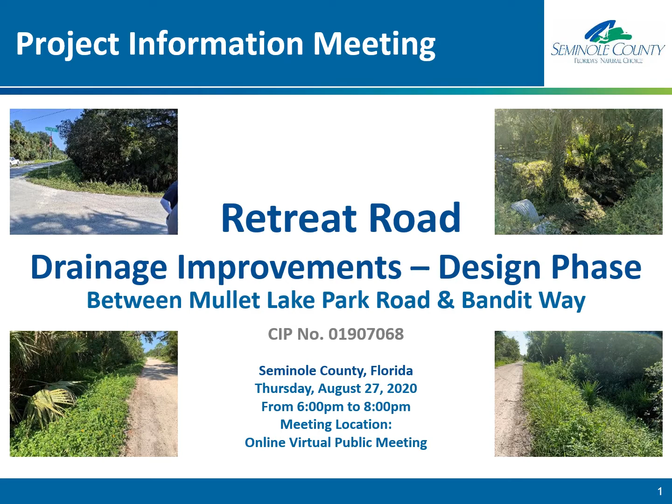Tonight's meeting is being conducted consistent with Title VI requirements. Public participation is solicited without regard to race, color, national origin, age, sex, religion, disability, or family status.

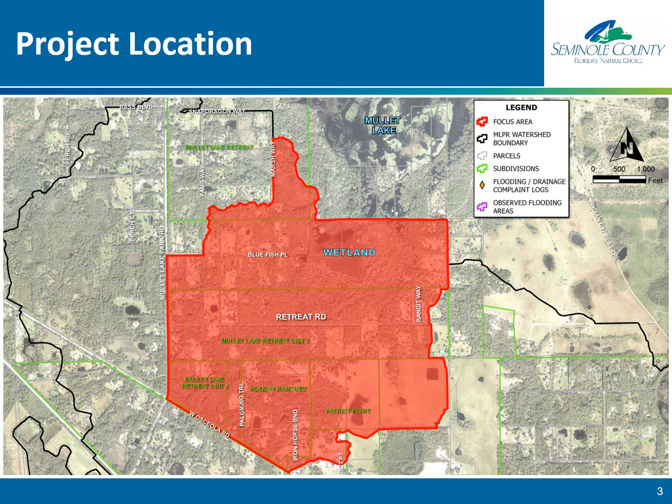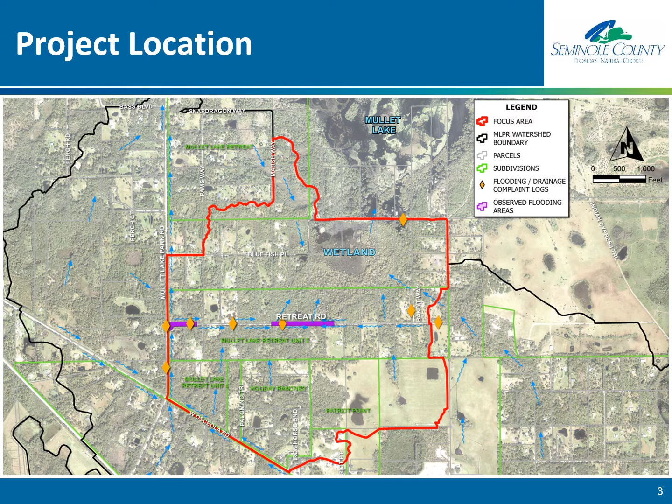Focusing in on Retreat Road, it is obvious there is reoccurring flooding following significant rainfall events. This flooding makes it difficult, if not impossible, for residents and emergency responders to use Retreat Road during significant rainfall. This is a major safety concern that the county takes very seriously.

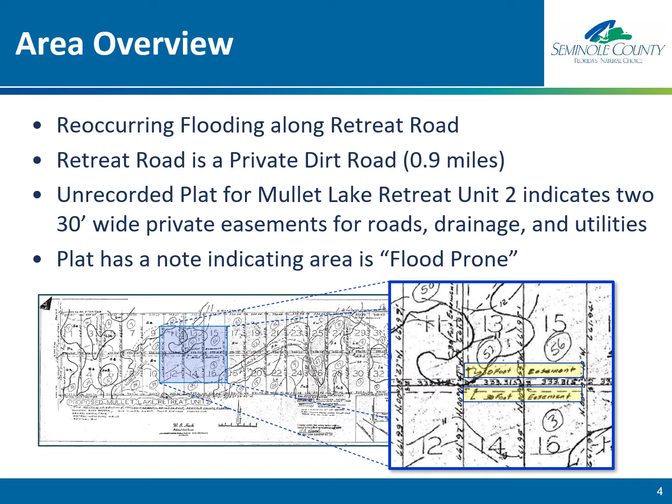One of the unique elements of having Seminole County involved is that Retreat Road is a private road. Maintenance of the road is the responsibility of the property owners within Mullet Lake Retreat Unit 2. An unrecorded plat from the year 1965 shows two 30-foot wide private easements that border the properties along Retreat Road. Retreat Road is generally centered within these two easements.

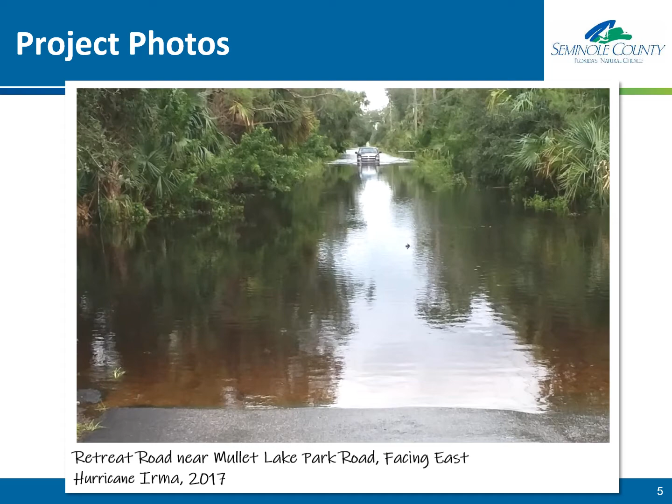Further east on Retreat Road, looking west towards Mullet Lake Park Road, you can see more flooding. This event was following Hurricane Irene in 2011, another significant rainfall event. As you can see, it appears the drainage ditch along the south side of the road is overtopping and flowing north over Retreat Road. This is consistent with the modeling performed during the planning phase of the project.

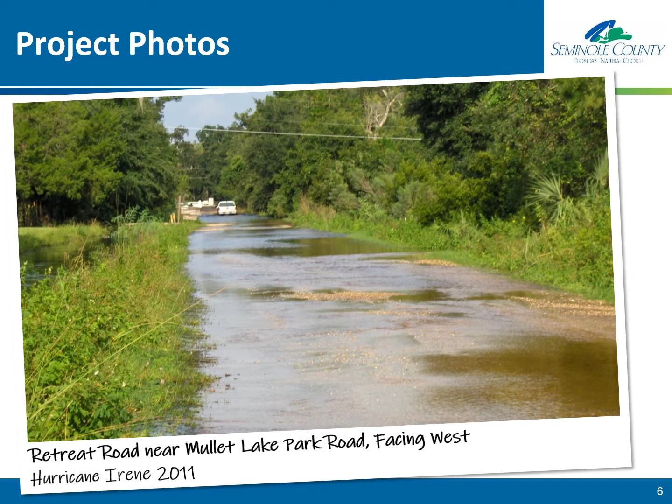These images were taken approximately a quarter-mile west of Mullet Lake Park Road following Hurricane Irma in 2017. This video, taken approximately a quarter-mile west of Mullet Lake Park Road, also shows flooding following Hurricane Irma in 2017.

Following the request of numerous citizens, property owners, and other stakeholders, Seminole County initiated an engineering study. The goals of the study were to confirm the flooding in the area by developing a computer model that simulates the rainfall and drainage flow, develop various conceptual improvements based on the model results to effectively reduce flooding while avoiding other adverse impacts, and to collect public input on the possible improvements. The study portion of the project and the first public meeting were completed in early 2020.

The county has obtained grant funding from FEMA through the Hazard Mitigation Grant Program to help fund 75% of the design and construction phases. The remaining 25% is funded by Seminole County. This funding source has very stringent deadlines that will be discussed later in the presentation.

The study design criteria was developed to provide flood protection for Retreat Road for the 10-year, 24-hour design storm event. This is the level at which Retreat Road begins to experience flooding. While this event is consistent with the county's criteria for similar roads, it should be noted that the photos shown were significantly larger storm events than a 10-year 24-hour storm.

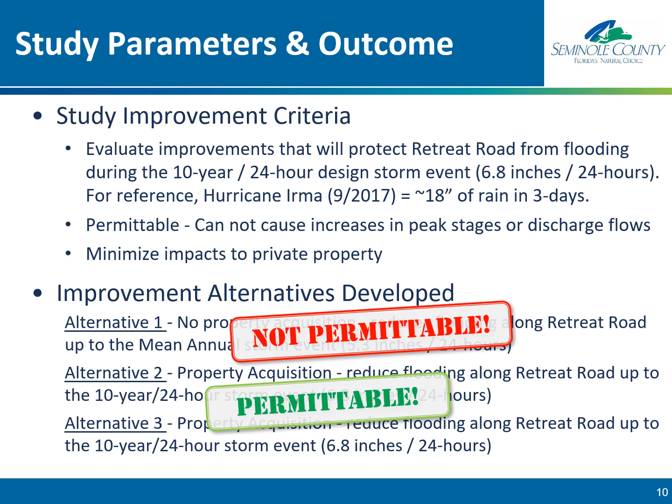Both alternatives provided the desired improvements to protect Retreat Road from flooding through the 10-year, 24-hour design storm event criteria. Both alternatives were found to be permittable through the St. Johns River Water Management District. As a result, the county quickly contacted the identified parcel owners and ultimately acquired the parcel necessary for Alternative 3.

Alternative 3 includes creating additional storage for stormwater runoff on the parcel acquired by Seminole County. Acquisition of the Goble property was completed in May 2020 for a total purchase amount of $273,000, including attorney fees.

The existing drainage ditches and culverts along the south side and those crossing Retreat Road would be upsized to more efficiently convey stormwater to the wetland area and outfall to the north towards Mullet Lake and ultimately the St. Johns River. Additionally, Retreat Road would be raised approximately 6 inches on average by adding additional fill in the 2 most flood-prone areas. These areas are depicted as yellow highlights.

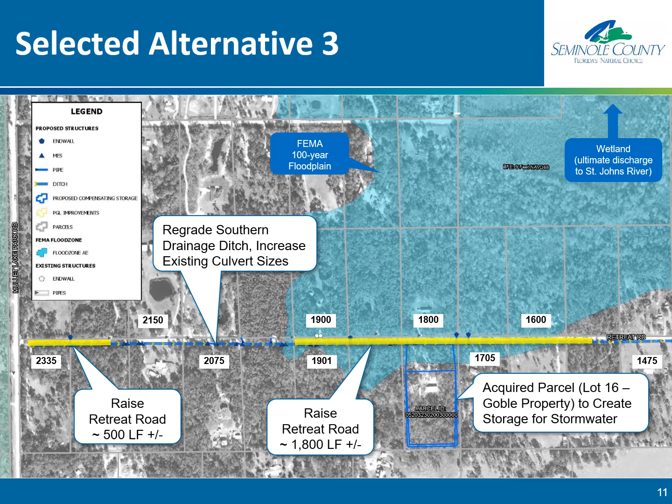These improvements would protect Retreat Road from flooding for a 10-year, 24-hour event. Estimated costs are approximately $1.4 million, including land acquisition. To reiterate, these improvements are anticipated to be partially federally funded through FEMA's Hazard Mitigation Grant Program.

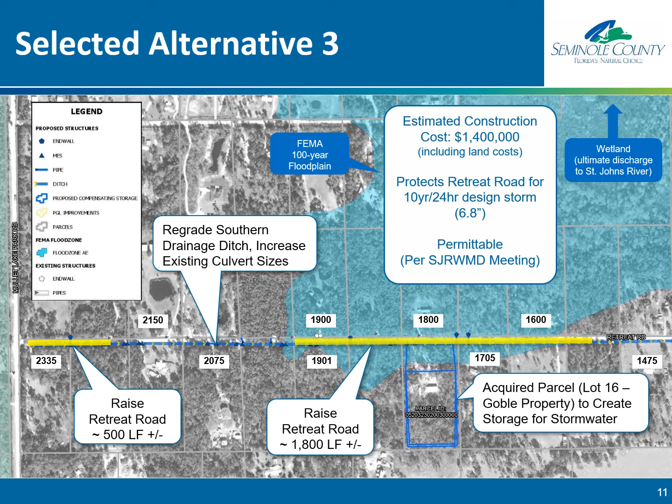Since the study phase was completed in January 2020 and the fast-tracked acquisition of the Goble property was completed in May 2020, the county has been aggressively moving forward with the design and permitting efforts. In March, the county began the formal design and permitting phase of the project.

The design efforts are ongoing, but several of the tasks have already been completed, such as survey, geotechnical analysis, contamination screening, a cultural resource assessment, and the necessary modeling to verify the design using the newly collected information. In addition, the engineering team has also used this information to complete the 60% construction plans and submit the permit applications to the St. Johns River Water Management District. The design improvements remain very close to what was presented as part of the study concept Alternative 3.

There are 3 typical sections being developed for Retreat Road. A typical section shows the roadway and drainage configurations as if you took a slice out of the roadway. The 3 sections are similar in nature and represent the work to be complete within the Retreat Road existing 60-foot wide private easement.

In typical section 1, the road will be raised approximately 6 inches on average and built up with a road-based material such as lime rock, for example. This is similar to the road surface that exists now, but at a raised elevation. Additionally, the roadside ditch along the south will be cleared of vegetation and regraded to flow more efficiently towards the new pond storage area. Any driveways along the south side of the road would be replaced if needed in order to tie back into Retreat Road. Typical Section 1 will be used along the highlighted locations.

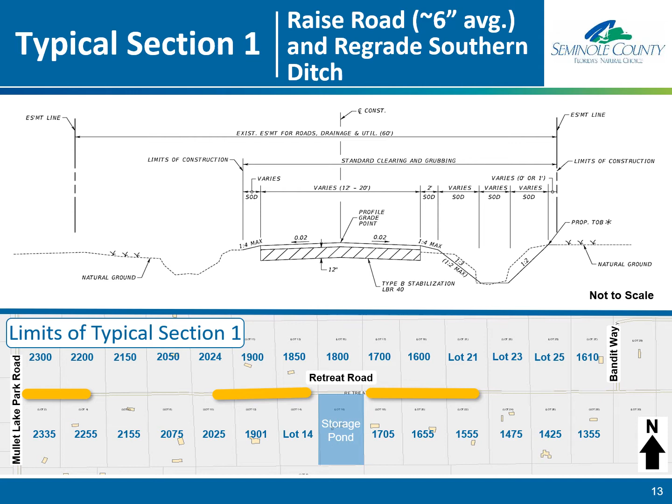Typical Section 2 is very similar. However, it will only involve the regrading of the roadside ditch along the south without raising the road in these areas. Typical Section 2 will be used at the highlighted location.

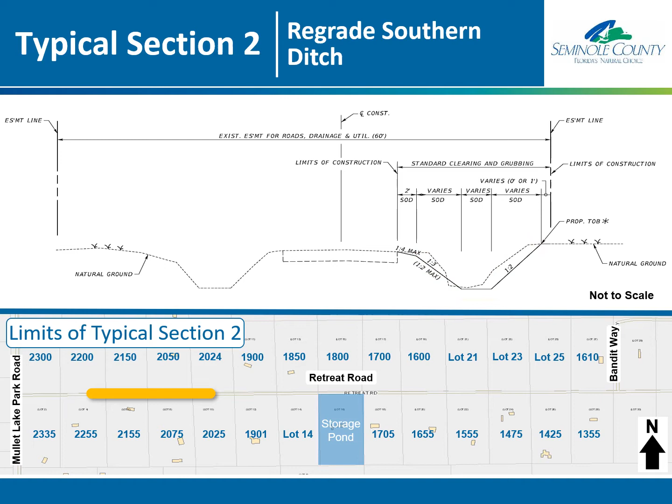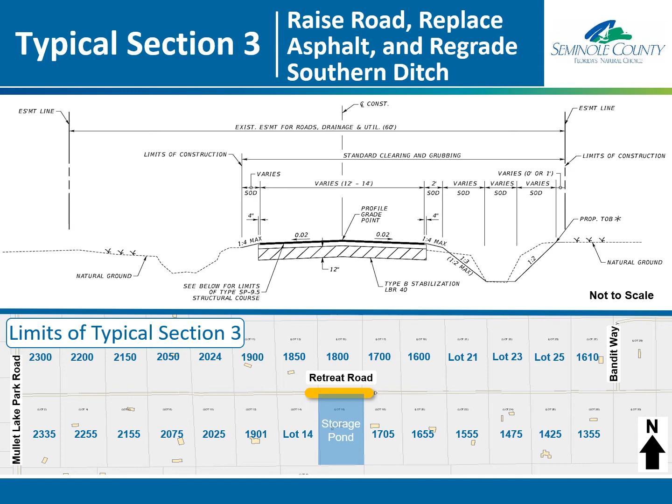Typical Section 3 involves slightly raising the road and regrading the southern ditch. However, this option will also include replacing the asphalt within the areas of Retreat Road that currently have an asphalt surface. The asphalt would primarily be in the lowest parts of Retreat Road, where the compensating storage pond will be constructed, and where Retreat Road most frequently overtops during significant storm events.

The proposed improvements are designed to work by stormwater flowing down the improved Retreat Road ditches towards the storage pond. As the southern ditch fills up, it will overtop into the storage pond and fill up the pond. Once the system starts to recover, the pond will freely discharge back into the ditch and then drain down through the drainage culverts under Retreat Road. This is similar to how the system currently discharges to the north, but now with added storage from the pond.

This improvement provides the system time to recover before flooding and overtopping Retreat Road up to the 10-year 24-hour storm event. It will not prevent future flooding of the road for more significant storm events or successive back-to-back storms.

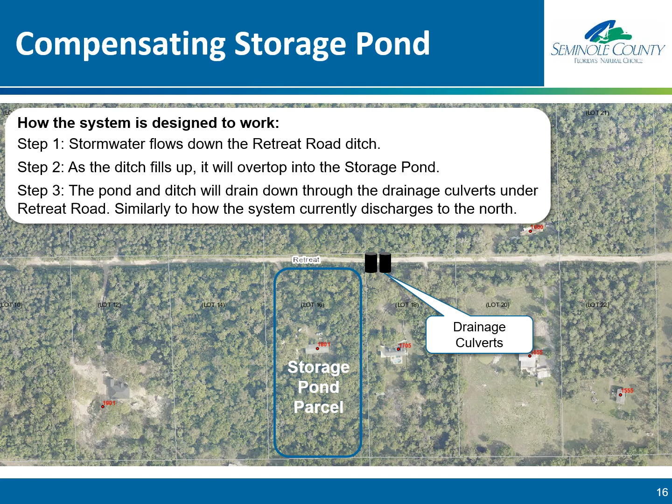In addition to the 60% plans being completed and submitted to the county for review, the permit application to the St. Johns River Water Management District has been submitted and is currently under review. However, there is still work to be completed. Next, the application for the U.S. Army Corps of Engineers will be completed and submitted for review and approval.

During the permitting review process, the design will continue to be refined, moving towards a final set of plans. The plans will include evaluation and design of a way to maintain traffic along Retreat Road during construction. It is likely that detours will be necessary due to the narrow nature of Retreat Road. Utility coordination will also occur to minimize impacts to existing utilities and for any necessary adjustments to utilities in order to minimize disruptions in service.

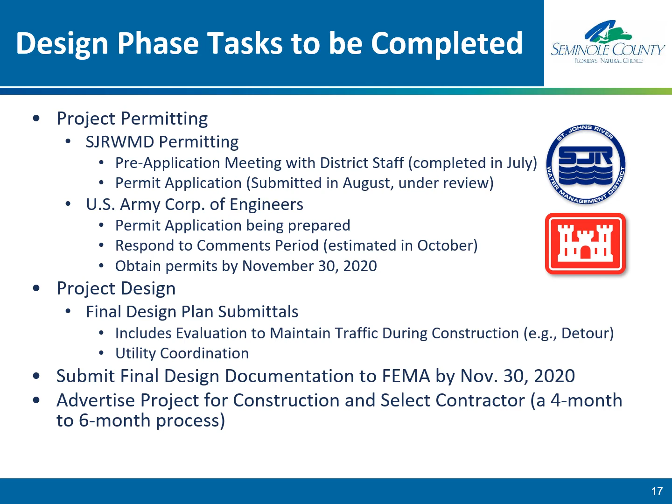The final design documents will also be used to satisfy the engineering portion of the FEMA grant funding. The project will then be advertised for construction, with a qualified contractor being selected to construct the improvements. When looking at the overall project schedule, we can see the engineering study was completed in January of this year. At this time, we have submitted 60% design plans and a permit application to the Water Management District. Next will come 90% and then final plans. That will complete the engineering design portion of the project.

The FEMA grant funding for design and permitting must be submitted by November 30th, 2020. Project construction then needs to be completed within 9 to 13 months once the contractor is selected by the county. It is anticipated that construction would begin in May of 2021 and continue into 2022. All FEMA closeout documents must be completed and submitted by June 2022 in order to meet the grant funding requirements.

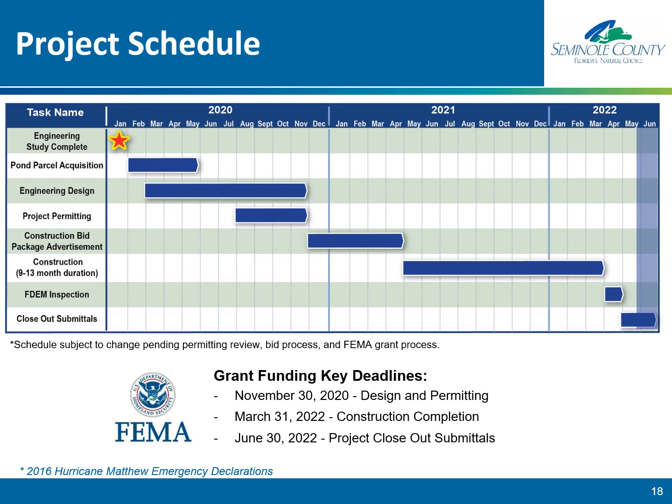This may be the most important aspect of the project. In order for the project to be funded, designed, permitted, and constructed, the property owners within the project limits will need to agree to two key elements before the grant funding deadline of November 30th, 2020. Number one, the property owners adjacent to the improvements will need to agree by signing a temporary construction easement to allow the county and its delegates, such as the contractor, to access their property in order to construct the proposed improvements within the Retreat Road private easement.

Number two, the property owners will need to agree to maintain the system in perpetuity in order for the improvements to be permitted by the St. Johns River Water Management District. The majority of property owners have already provided consent that they intend to agree to these conditions based on the notification letters sent out in January of this year. At this point, the formal temporary construction easement documents are being drafted by the County Real Estate Management Office and will soon be coordinated with each property owner for signatures.

All property owners must sign the easements in order to obtain the Water Management District permit. Without the permit, the FEMA grant money cannot be obtained and the project will not advance. Therefore, it is extremely important to voice any concerns with the project within the public comment period so your concerns can be addressed as soon as possible.

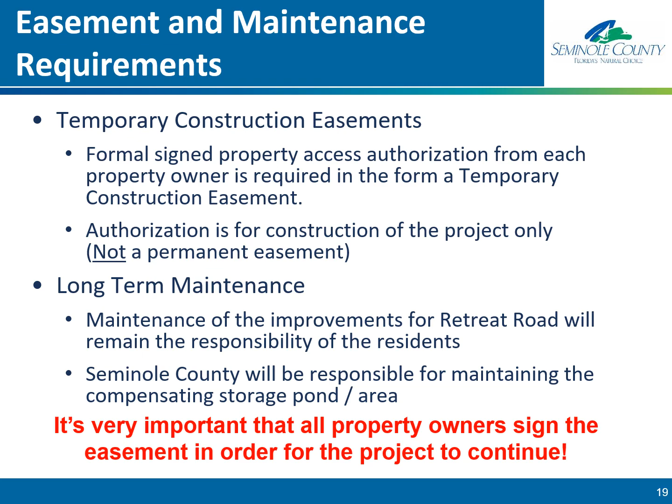We recognize you may have additional questions or comments regarding the information presented at tonight's meeting. There are multiple ways for interested parties to submit questions and comments regarding this project. Perhaps the easiest way to submit comments or questions is using the meeting chat box during the virtual meeting on August 27th from 6 p.m. to 8 p.m. Following the presentation, the question and answer portion of the virtual meeting will remain open until 8 p.m. Another way is to use the online feedback form on the project webpage at https://www.seminolecountyfl.gov/CIP01907068. Because the schedule is accelerated, we respectfully request that you submit your comments no later than August 31st, 2020.

You can also contact the Engineering Consultant Project Manager, Mr. Steve Sommerfelt, by phone at 407-971-8850, or email him at ssommerfelt@inwoodinc.com. The Seminole County Project Manager, Tuan Nguyen, can be reached by phone at 407-665-5770, or email him at thuynh@seminolecountyfl.gov. Please include Retreat Road Drainage Improvements public feedback in the subject line.